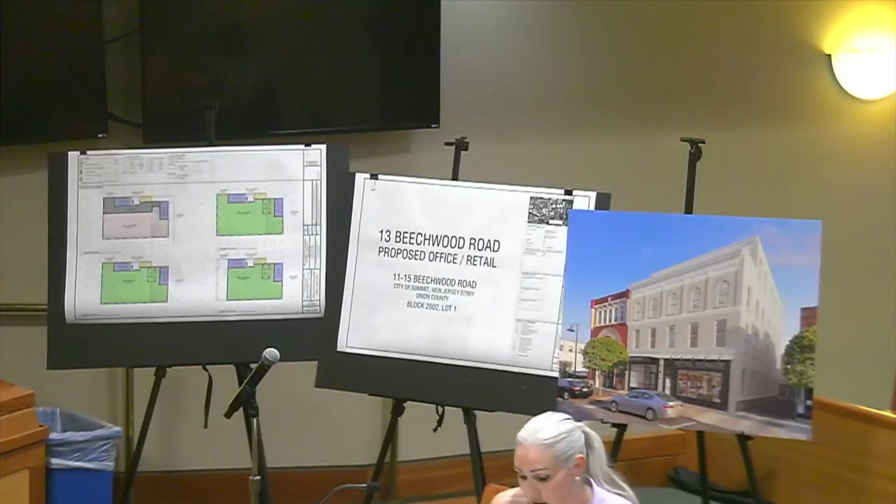Are you ready? Yes. In response to the comments and feedback received from the Board of Adjustment and the Historic Preservation Commission at the prior hearing, can you describe the process your firm undertook with the applicant to reevaluate the design and incorporate revisions to address the concerns that were identified? Yes, we listened to the board and the historic preservation comments regarding the facade, the Beechwood historical elements of the building, the detail, the horizontal features of it, and also just the nature of the architecture. We carefully went into the building, took our time to study the architecture, really study the floor, how the building was braced, how it was built, to see if we could actually preserve the facade.

After further consideration and analysis, we determined that there's a way to preserve the facade, set new floor elevations, do minor modifications to get ADA accessibility, modify the windows with slight tweaks on the sill heights, and really set the elevation so that we could work with that existing facade. That will require, if you don't mind, I'm going to approach the rendering and point out a few features.

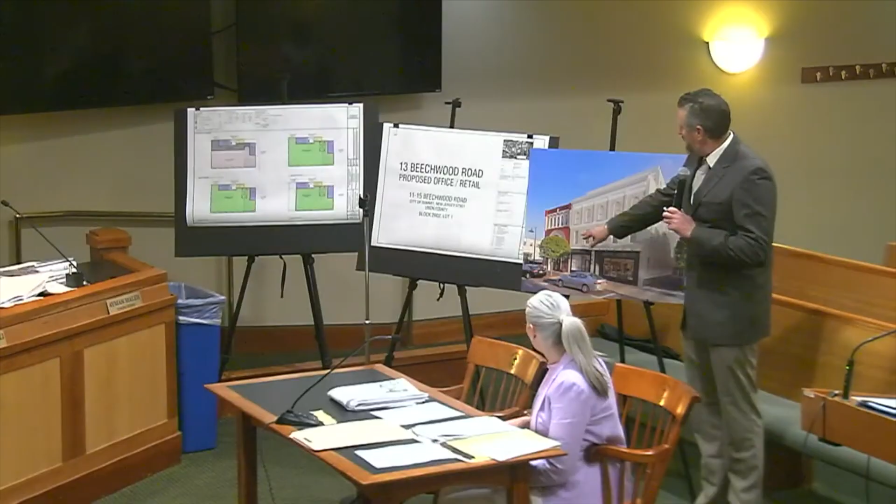We're going to repoint all the brick and repair it as much as we can. There are some cracked elements in that building we previously testified to. We're going to try and reconstruct that. If reconstruction doesn't happen, we'll have to strap it and make a repair to support it.

Reconstructing all of that element, the third floor windows will be restored to an arch top. They're currently square rectangular windows with a plywood infill on the top, so we want to make that an arch top window and bring it back to a full light.

The side facade, same thing—we're going to restore that arch top window on the third floor, and then going down we're going to infill and make that a full window opening. We'd like to remove as much of the window casing as possible. There is some blocking that will have to stay to put those new windows in, but we want to widen them out to as much of the masonry opening as possible.

The fourth floor is now going to replicate the building in the style of architecture. We were previously modifying that, but since we're restoring the facade, we thought it would be better to keep that similar architecture down the side alleyway, keeping that arch top, and making another cornice element at the top, then opening up because of the weight of that.

If you don't mind, I'm going to go to drawing A201. It's our Beechwood facade.

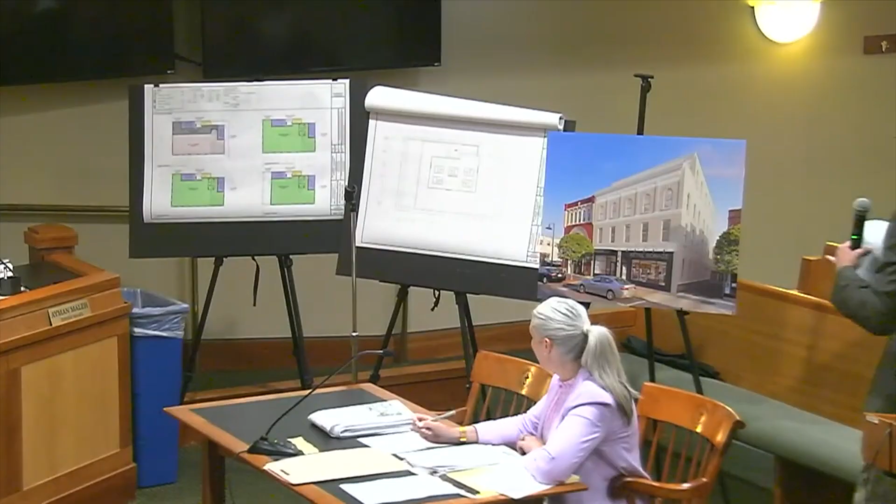Perfect. And then I think you had an exhibit, which should be marked A4, that goes through the FAR calculations for the building. So we prepared drawing AA101. I'll label it Exhibit A4. Are we up to A4? I thought the notes said yes. So A1 was the rendering, and A2 and 3 were materials and colors of bricks and things like that. Okay, I only had a note about 2, but I'll take your word for it. We'll mark this as A4.

So Exhibit A4, drawing AA101, is our proposed building area analysis, prepared to determine the FAR and how we calculated our floor area ratio. It's color coded: office in green, site circulation in purple for our stair towers, and support area for our mechanical shafts, which also count toward FAR, then common area and retail. Our basement storage doesn't count toward FAR since it's used only for retail storage. Our total FAR for the building is 12,331 square feet, which calculates to 299% of the FAR calculation. If you'd like, I can break down all those numbers.

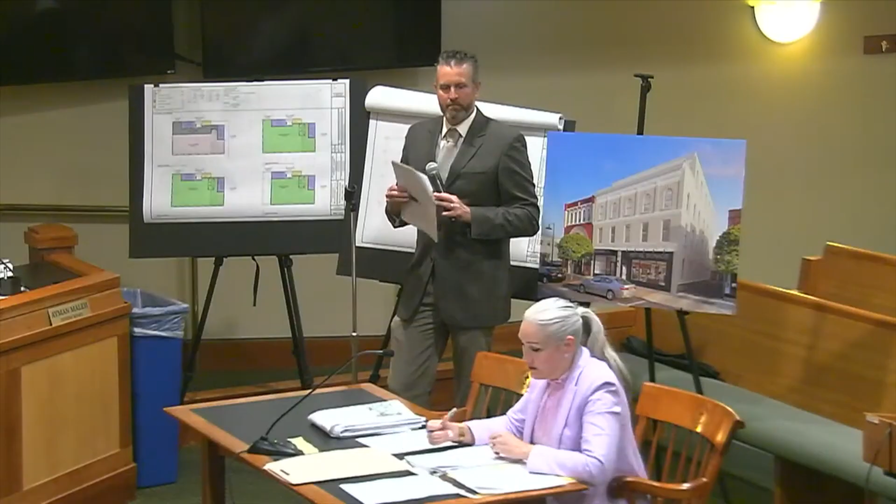And if you could just go through the rendering and discuss the materials and the colors. Do we need to bring this one in as a new exhibit? No, this is part of the filed plans. Okay, you're good, very good.

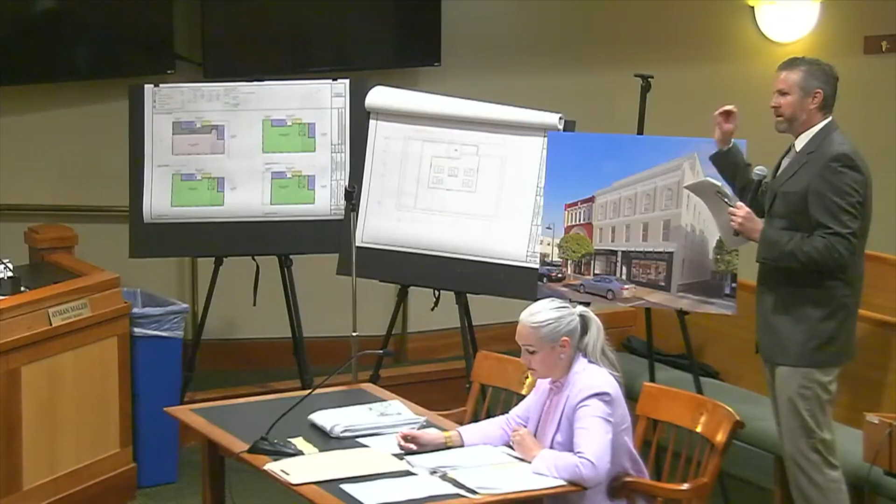So the existing building is white, pretty much washed out. Every cornice, every detail, every element of this building is the same color, as if someone just took a roller or sprayer over it. We want to accentuate some of the details with a light color pop on the cornice on the second floor, the cornice between the second and third floor, and the cornice element that caps the building. Also detailing and a slight color pop for the column capitals and the fourth floor element above, as well as the infill. The field of the building will be an off-cream or off-white color for a slight contrast, nothing too large, just something subtle that accentuates the horizontal articulation and makes the design feel more refined.

The side facade we're going to paint, because matching that 120-year-old brick would be almost impossible. We can find similar style and size but never get a color match. So we want to paint that side facade while keeping the rubble stone finish. Our base will be anchored with an off-charcoal color to make the retail entrance and office entrance pop from the street, giving nice contrast on the ground floor, while the field of the building neutralizes itself and gives balance.

What's the color of the storefront mullions, and what's the color of the window frames on the fourth floor? The window frames will be white on the second, third, and fourth floor. The ground floor will be bronze. Thank you.

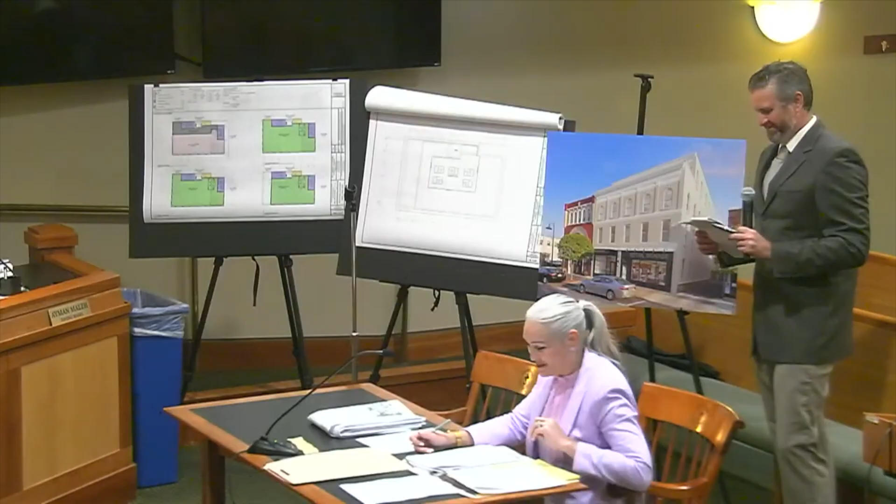You've prepared a comparative zoning chart, which I would ask be marked as A5. Can you explain what this exhibit demonstrates and how the revised plans compare to the original submission from a bulk and zoning perspective?

Yes, so we prepared a letter dated June 23rd, 2026, that was just a summary of our changes to the plan and the approach that we had. Attached to that is a zoning analysis comparative chart, so that is this document attached to that letter.

I'm not sure if the board actually got that letter. Oh, they did not get that. Okay, so I guess if you go through it, and then I can provide the board with a copy.

Okay, so the changes that we made were, the first one on my list was building coverage. We had a reduction in the building coverage from 84.10%, or 3,468 square feet, to 78 point- having a hard time seeing that number, I'm going to bring myself to my larger screen. Excuse me, you're comparing to the previous submission, not the current construction? Correct, just to clarify, the previous submission, correct.

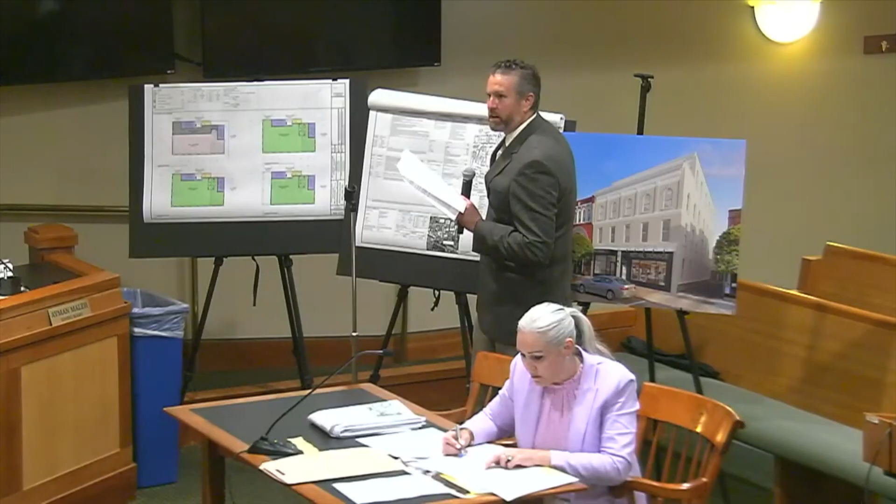So I'm going to utilize drawing T002, our zoning analysis and site data. Our building coverage was reduced from 84.10% down to 78.25%, so we had a reduction of approximately 6% in building area. That's a result of us having a greater setback along our adjoining properties on the east side and to the northeast side. So setting ourselves back reduced our building coverage calculation.

So how many square feet does that boil out to be? That ends up becoming 3,227 square feet, where it was previously 3,468, so it's about 240 square feet.

Okay, so you reduced that, but you actually gained retail space by doing away with the parking spots. Yes, but we also increased the setback in the back of the building, so that's where the reduction was.

Yes, and then I think there's also an increase in the total side yard from .01 to .06 feet. Yes, so we were originally going to build out at that corner of the property, the south side of Beechwood. We're set back just .06 feet, whereas previously .01 feet. So what's .06 of a foot? It's inches, yes. So you went from 1 inch to 6?

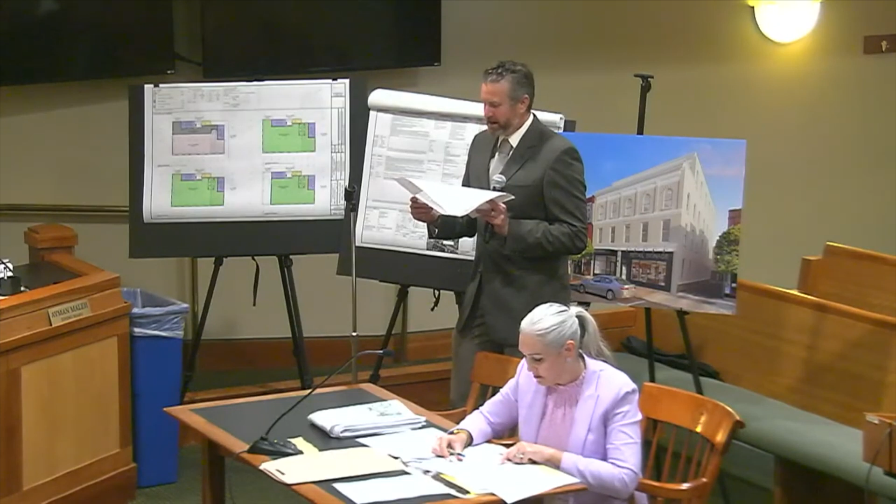As I testified earlier, it's a minor discrepancy, I wouldn't even mention it personally, but it is a slight change. We also reduced the building height by 3.67 feet, as I previously stated, and the appurtenance was 3 feet 1 inch. We've reduced the mounting height of the facade lighting by 6 inches, down to where the existing cornice line is. We've reduced the terrace lighting up on the fourth floor by approximately 2 feet, or 1 foot 10 inches, because the building height came down. Other modifications were signage mounting that was also reduced in height because that cornice holds us to a certain elevation, since we want to keep that existing cornice and not modify that existing facade.

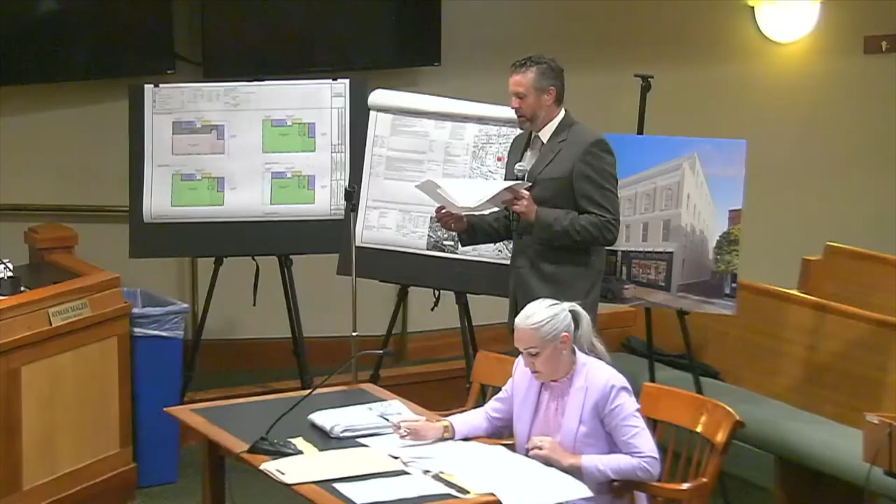And then we had a modification in the illumination for our lighting so that we had egress path lighting from around the backside. We need lighting to illuminate that 5-foot setback. So again, going back to SP401, just illuminating this 5-foot area along the back of the property.

Okay, and then the original application also included a fourth floor component. Can you explain how the role and design of the fourth floor has changed as part of the revised plans, and how it relates to the other modifications made in response to comments received at the prior hearing, using Exhibit A6?

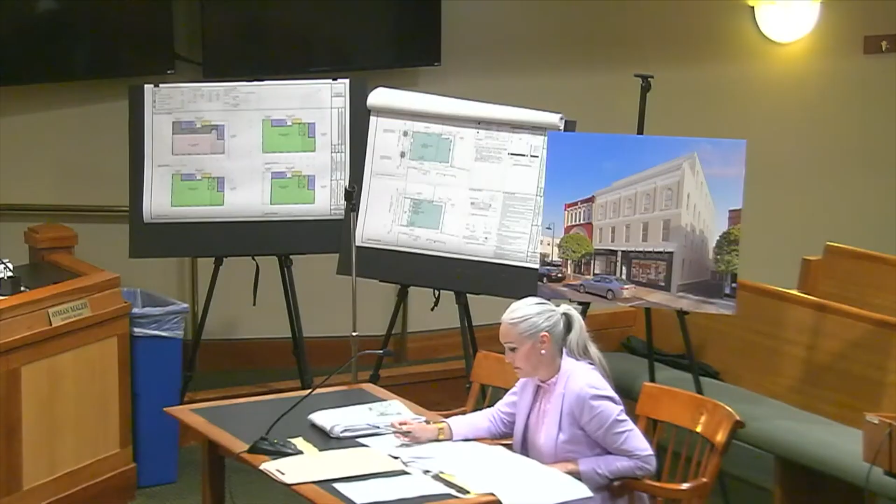So we prepared drawing A201, an area reduction analysis of the volume that was lost due to setbacks or other components or site limitations that we had. If I can, I'll label that A6.

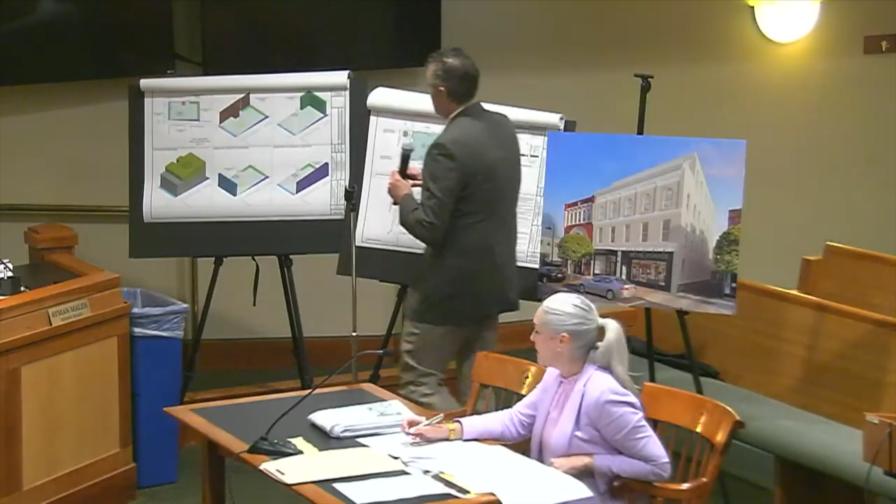And can you see that from over here? Do you want it in the middle? Would that be better? That's okay. You can easily- do you want to just move it to the middle? Because I think we can see it better. Thanks.

So we had a few constraints on the property. We have the existing facade, which is this image in the top right corner. The blue area is the existing setback of that facade, so that's 4.4 feet from the property line. That 4.4 feet across the property equates to 210 square feet, so that's 210 square feet per floor at 3 stories, which is permitted by the zone, by the CRBD zone, and that equates to 630 square feet of gross floor area.

If you had built to the property line- if we were to build to the property line, to that front property line, which is also permitted in the CRBD district.

We have a slight encroachment of our adjoining properties on the north side. Both of those buildings have a slight encroachment onto our property, and the elevator is allowed to be eliminated from the calculation. So across 3 floors, at 119 square feet per floor, that's 357 square feet gross floor area. Our increased setback of 5 feet, that L shape in green, is 327 square feet, totaling 981 square feet of total area.

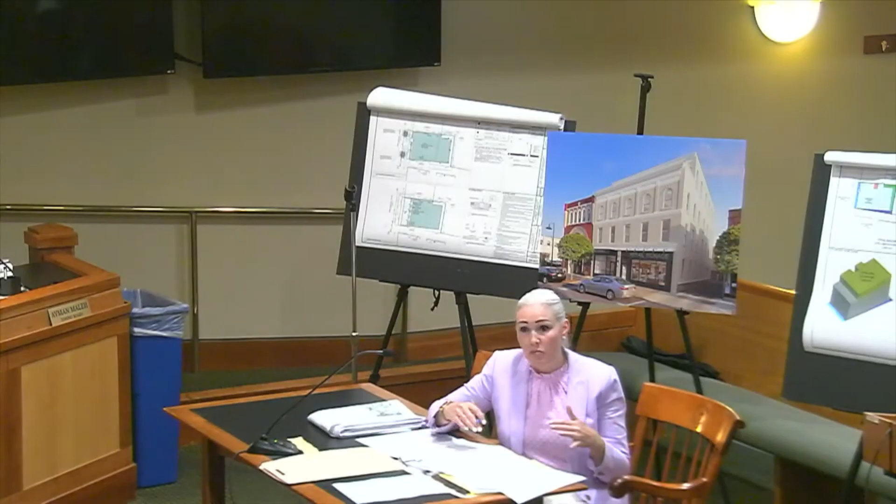A 300% FAR. So if they knock the building down and built it to the property lines, which they're permitted to do, they could put 300% FAR on 3 floors, but that would not be a better design. It would stick out beyond the proposing Boxwood property, so you'd have a building that projects beyond the Boxwood building, our adjacent property, which would then reduce the sidewalk. You'd have a building that was touching the neighbors. I'm just saying you're telling us you're losing that. Well, but you gained it with the fill into the backyard.

Yeah, from our previous application, we only gained 300 square feet from the fill-in of the parking. Times 4 is 1,200 square feet.

But I think it's easier to give a little bit of reference to what exists in this conversation, to not just compare it to the previous, because now we have a new set of drawings, and I think that's some of where these comments are. It should also be considered in relation to what is permitted, and what is permitted is 300% FAR on 3 floors. This is not a comparison from the previous scheme, this is a comparison versus as of right. Correct. That makes a little bit better sense.

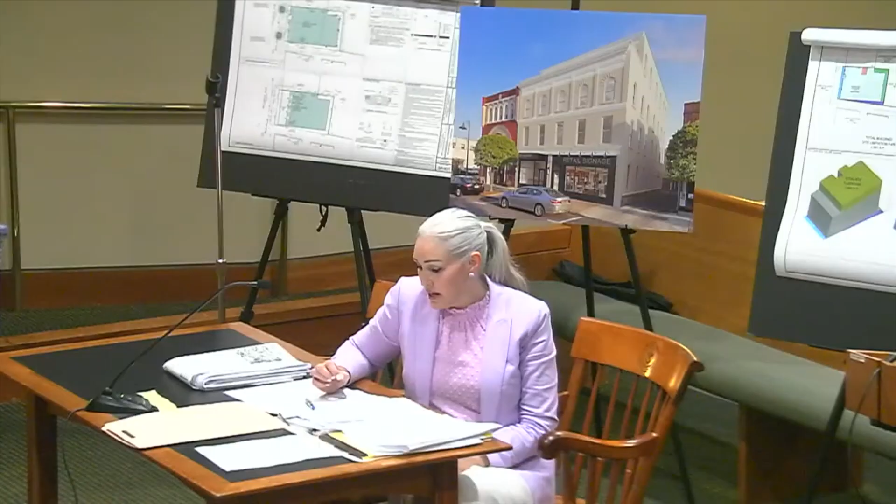Okay, and you also prepared a sightline exhibit A7. Can you explain what this demonstrates regarding the visibility of the fourth floor from the public right-of-way?

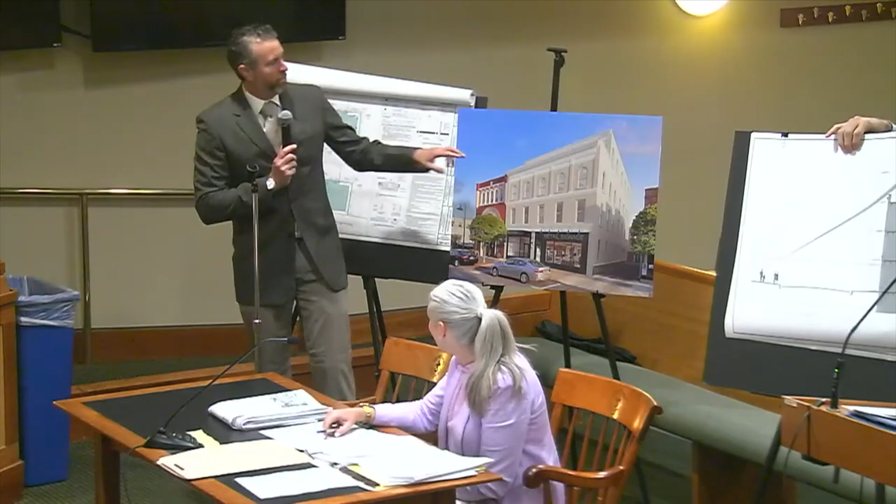I'm going to first start with the rendering because that actually depicts it. Do you mind putting this up really fast? It depicts exactly what you would see from the street. So we took this rendering from the opposite side of the property, and you'll get a glimpse of just that slight cornice on the top. We wanted to show the angle because we want to show the architectural style down the building, but if you're walking down Beechwood on the opposite side of the sidewalk, you would only see approximately 2 feet of that building across the top. And you would see it on the side, but because it's now the same architecture...

It blends in, that was the other reason why we wanted to stick with that similar architectural style, is that it would blend with the existing building better. So our line of sight diagram, and I'll come back to this exhibit now. Our line of sight diagram A301, I'll mark that as exhibit A7. It shows a person 68 feet away, about my height, with a line of sight that would give you the top 2 feet of the building.

So I have a question about that, because watching the video over the weekend and being out there this morning, and now seeing this picture again, that exhibit and the one at the previous hearing, was that not intended to show the view of a pedestrian? Because my reaction was that that rendering looks like I'm a very tall pedestrian, if I'm a pedestrian.

Yeah, it's me, a person of my height, so about 6 feet. The rendering was intended to show a pedestrian across the street, exhibited from the 6 foot eye level height. It's a different reference for different people, but it gives you a different angle and a higher projection line. So the shorter you are, the less building you'll see.

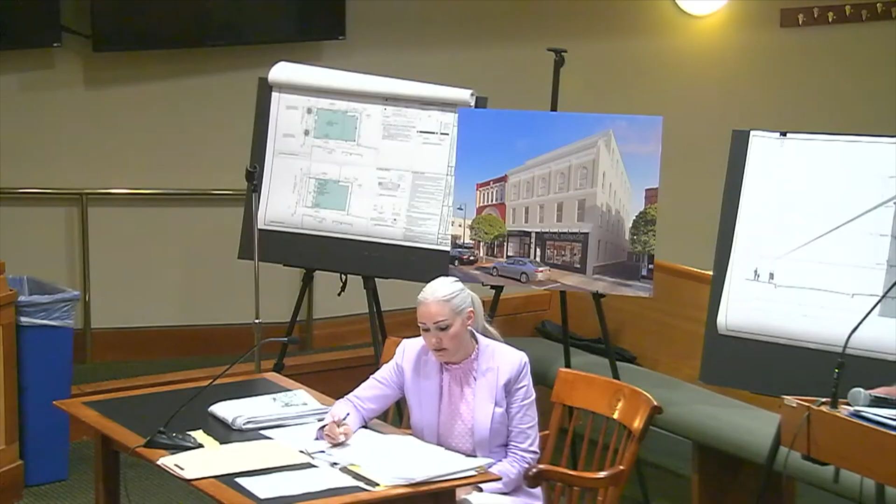Based upon all the revisions incorporated into the plans, including preservation of the existing facades, reduction in building bulk, the increased setback, and the revised design of the fourth floor addition, can you explain why the proposed design is appropriate for the property and consistent with the character of the historic district? Yes, my first statement would be that we met with Historic Preservation after we completed this redesign, and we felt they were supportive of us maintaining the facade and keeping it.

I know they had a few comments in their letter about mullions and divided light, and I'll address that, but by keeping that facade, it meets the intention of Historic Preservation, the CRBD district, and the Historic District. We maintain the architectural style, the features, the vertical articulation, the horizontal articulation. I think the paint scheme accentuates some of those features, so it's not just a bland facade as it exists today.

From the Historic Preservation side, they had asked about divided lights. Divided light, in our opinion, is more intended for residential application. This is intended for office use, so we want to give them as much of a clear picture window as possible. If we were doing this as an adaptive reuse for residential, we would clearly do a divided light window.

When we met with them, they had mentioned doing rectangular windows on the fourth floor with larger openings, but as we discussed, due to the hierarchy of architecture, putting a rectangular window over that arch top did not seem like the right architectural element for the building. Continuation of that arch top on the fourth floor was the right architectural answer to meet that Federalist and colonial style.

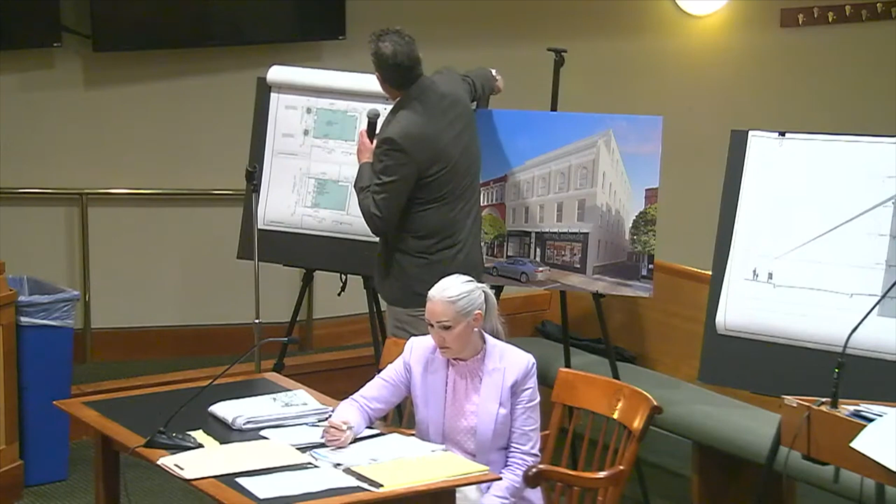How about pedestrian accessibility outside as this is being constructed? Yes, we have, and I can go to our site plan. Drawing SP 302 shows there will be a time where we will have to do a sidewalk bridge to protect pedestrians and maintain sidewalk access. There will also be points where that sidewalk will need to be closed for certain portions of the construction, but the intention is to try and maintain thoroughfare as we did with 475. There were times we had to close it, and times the majority of construction it was open.

So would you be willing to submit a pedestrian detour plan? Yes. Submitted beforehand? Yep, so we'll work with the police department and the building department to do pedestrian detour plans, site plans, and maintenance of traffic plans as necessary.

I think that's all I had. Chairman, thank you, a few questions. As was just mentioned regarding the sidewalk area, we had a question, it wasn't necessarily identified in our report, but I was thinking about the sidewalk. Do you see any utility improvements and replacement of the sidewalk necessary along the streetscape?

There will be replacement of the sidewalk. Okay, so you'll replace it in kind? Yes, in accordance with the standards that are out there? Yep, there are portions that will have to be cut up and removed as a result of general construction, setting the floor elevations, and the resloping of that sidewalk to meet our accessible entrance points. So I can actually show you the scope on SP 101, for the board.

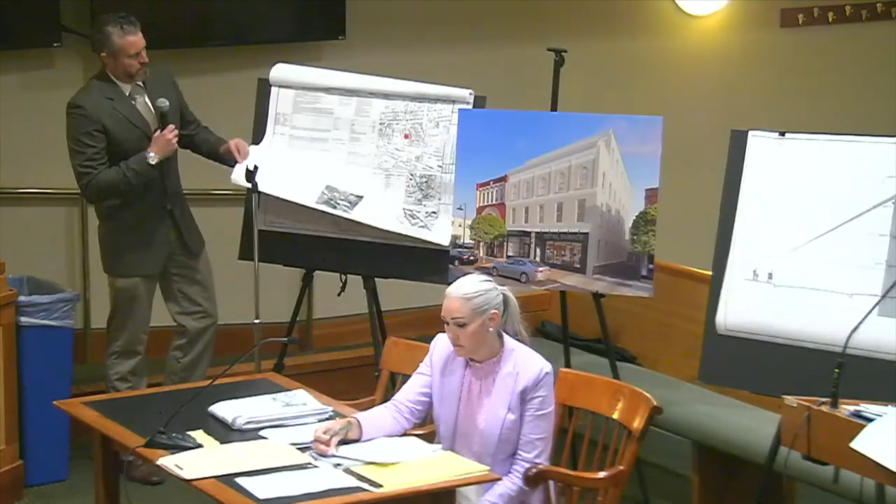So if you look at drawing SP 101, detail number 1, there's a hatched area that we expect that portion of the sidewalk to be replaced. It will end up having to tooth into that existing sidewalk, but we want to match the city standards there. And that's the hatched area you're talking about on the property? Yep, or it goes beyond the property because we'll have to rework some of that slope and sidewalk to maintain accessibility. I see that now, okay, thank you for that clarification.

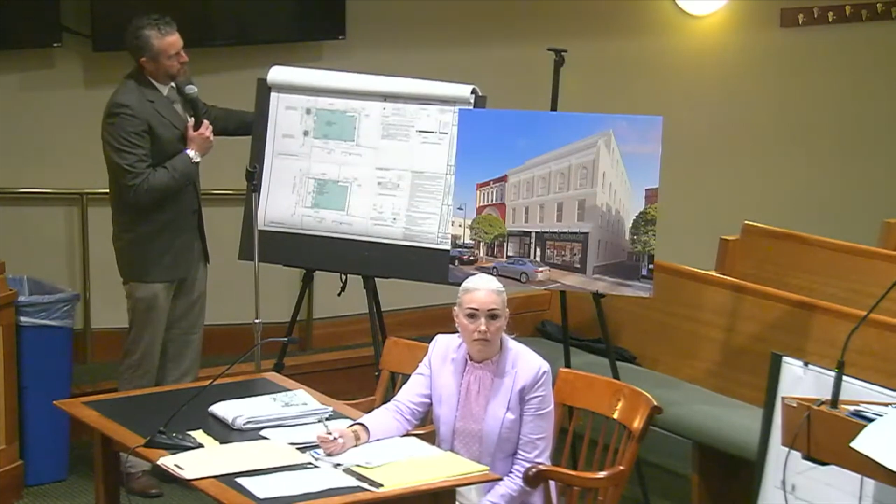Regarding the dumpster enclosure areas, I think you just identified that you did an analysis to make sure there's enough trash area for the rest of the building? Correct, so that's on drawing SP 401. There's a trash calculation or refuse calculation in the top right corner, which has been revised since our previous application due to the area of the building. Okay, thank you.

Looking at the architectural rendering that you provided from the street view, the side elevation of the building, the alleyway itself, is there any need to differentiate the fourth floor from the third floor? Is there any benefit in doing so from the design standards guidelines? It talks about breaking of horizontal or vertical elements. I know I don't want to cross over with the historic commission, but is that something you would have an opinion about? Yes, we wanted to maintain the third floor.

Again, changing the spacing of the windows and the style of the windows would have changed the hierarchy of architecture. So that arch-top window on top of an arch-top is what you would see in the colonial or federalist style. Okay, and any reason to have a cornice or band that would break? It doesn't exist today, so we wanted to maintain the existing. Right now, the current facade actually steps past the chimney and drops low. I can indicate that line on drawing A201, I'm sorry, 202.

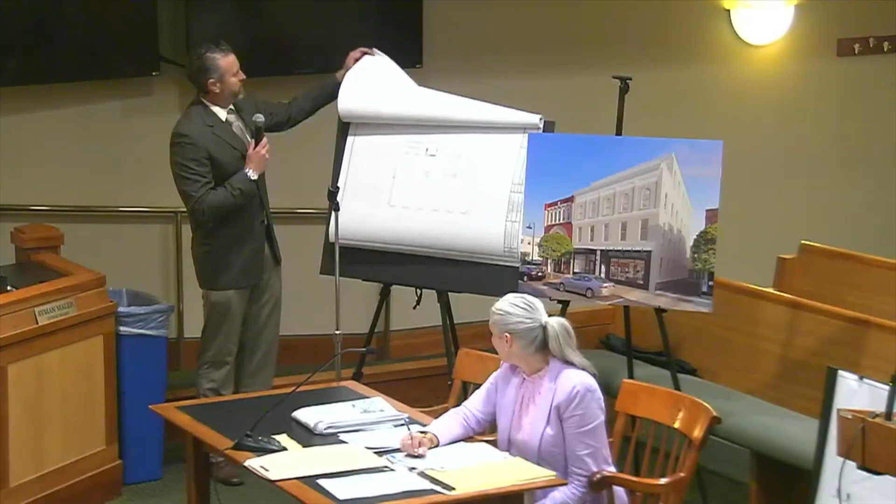So drawing A102, we have a front entrance here for the retail space. Due to the depth of the retail space, subject to occupancy, they may need a second means of egress, which would then have to egress through the back of the building here. And then all office corridors or office features in 4 stories or 3 stories or more require 2 means of egress. So we have an egress discharge off the back.

And during the nighttime hours, we want to make sure that that pathway along the back property line or rear property line is illuminated. But that illumination's occurring at ground level? Correct. And it's really just illuminating the back alleyway? That's correct.

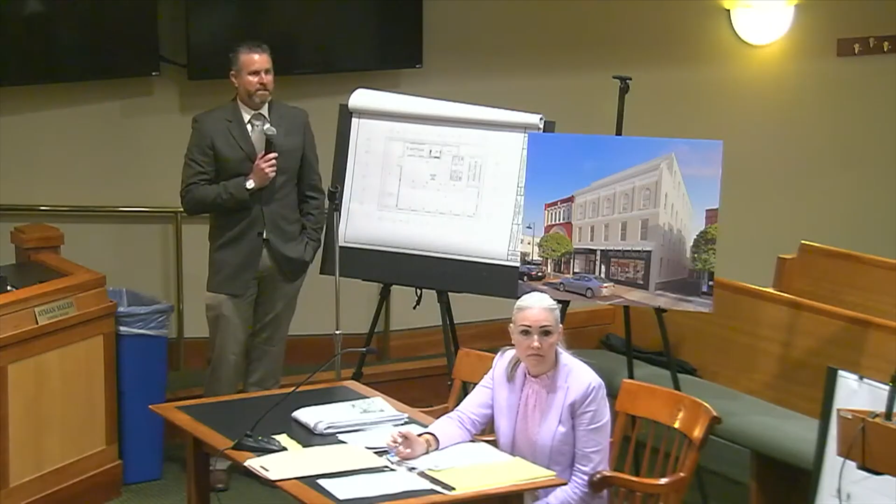You may have covered this in the prior testimony or prior hearing: what is intended for that upper outdoor space? Are there any events planned or any planned utilization of that, or is that really just an amenity space for the office? It's intended as an amenity space for the office user. The hope would be it's a single office user that can utilize that space as one, subject to how this building gets leased. But it's intended as the office use.

Any outdoor speakers anticipated for that space? No. Okay, thank you. There was an application where it was an upper terrace with outdoor speakers - that's why I touched on it, so thank you.

No further questions. I believe in our previous testimony we did put hours, kind of a time restriction, on that utilization, so you're stipulating to that? Correct. Yes. Okay, thank you. Thanks, Ed.

Board members, what questions do you have for this witness? Mr. Kern? Thanks, appreciate the reduction in the height variance or the request for the height variance from the last presentation. But, I'm not sure if I heard it yet or not, but what are the special reasons that exist for us to grant the variance? Because it's a D variance, and then maybe touch on the positive criteria, that'll further the purpose for the municipal land use law.

So we do have the planner testifying next. I don't know, he can answer that question for you. That'd be great. Thank you.

Great, Tom? Yeah, so there was a lot of testimony at the last session by Nick - I won't even try to pronounce his last name. Sapteris. Thank you. Yes. He didn't use the word impossible, but it came close, saying it would be impossible to preserve the facade, okay?

So you use words which make me think, is it more accurate to say you're preserving or replacing but having it look similar, or is it a mix? The intent is to preserve it, but we will have to replace certain elements of it if they are found to be damaged. The reason why that testimony was put on the record is because it will be very difficult to do. And through lots of conferring with our client, he has agreed to undergo that challenge with us.

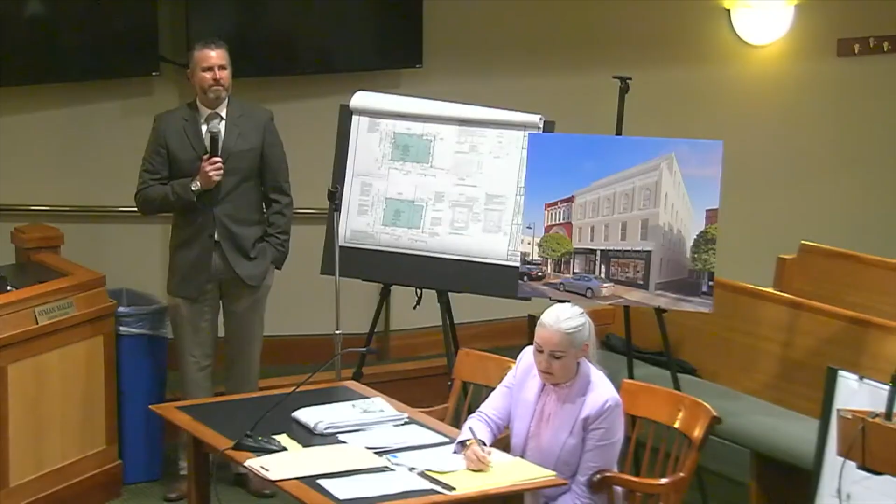Okay, can that note be updated to say that you will manage it? Absolutely, it just, because I think that maybe we can provide clarification for Marie on our note. Yeah, thank you for bringing that up, because all of a sudden when you started saying it, that was something I thought about. It sounded like when we read that, you were just going to discontinue it, to heck with the neighbor, and—No, to the contrary.

So you're going to disconnect it and redirect it, correct. I think Mark would be upset if we disconnected it and left his neighbors abandoned. It could also be a problem for your building itself to have everything come towards it. Correct.

So that was one. The last question I have is going back to Ed's comment about putting some kind of cornice between the third and fourth floor, some kind of separation. I see what you're saying about the building, sort of the jog. Yeah, if you can go back to that. Yep, I'll get you the side elevation, A202.

I guess my question is, is there a place to add something sort of decorative in there? If I'm looking at it straight across, maybe something that looks like a sill under the fourth floor windows, something that gives it a little distinction to break up the floor, to the point that Ed made. Shouldn't there be a hierarchy between the main Beechwood facade and the alley facade?

Yes, that's what I was going to say, is that I think if we wrap this cornice around, it will take away from the Beechwood facade, and it would actually accentuate that fourth floor, where right now it blends in vertically as part of the field of that side alley. So if we had that horizontal break here, I believe this would look like a cap on the building rather than part of the building. Okay, thank you.

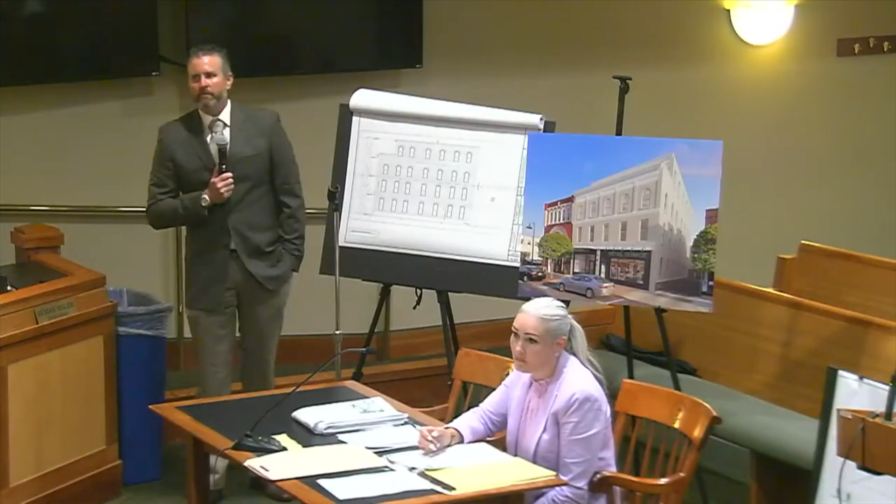I'm sorry, I didn't understand. Are you talking about the rear neighbors? Yes, they're both on the, I guess it would be on the alley side as well as the north side. So I'll go to SP 101. So there are windows on our adjoining property here, and then there's a window here, and we're proposing a few rear windows as well. That window to solid ratio can't exceed 20% with the 5-foot setback, so we are under that calculation.

All right. Any other questions, Don, go ahead. Are there any exterior sprinklers on that wall? No, it's a fully sprinklered building though, within. And we've done deluge systems on facades if necessary, but we would defer to the fire subcode to advise us on that if he requires it. But again, it meets the building code standards for setbacks.

All right, any questions only? Oh, go ahead. You said there's 5 units, where are the 5 units? Is it like retail 1, and then each? Yes, so just got that. I'll walk through each of the floors really fast.

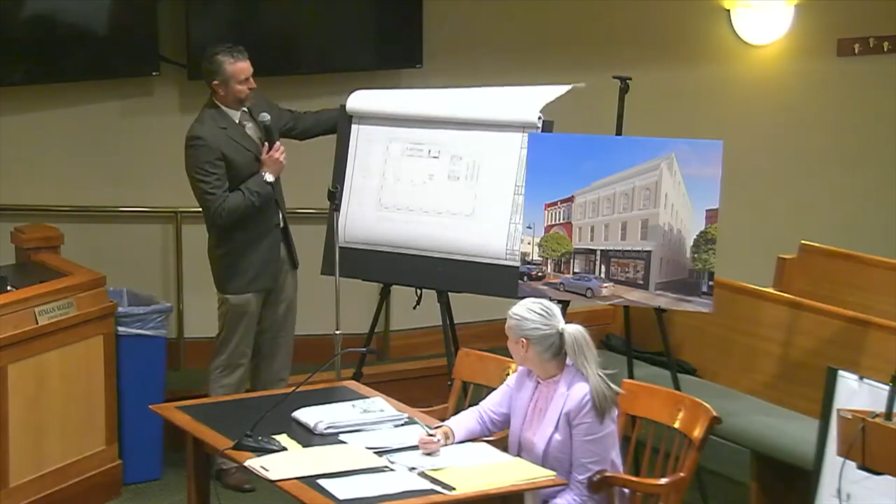So I'll start with drawing A102, which is our ground floor. We have the retail as number 1. We have the office lobby, or first floor common area, as 2. We want to keep those zones separate. And then there are 3 floors, so we have 1 unit for the second floor, 1 unit for the third floor, and 1 unit for the fourth floor, which would be the 5.

The second one on the first, on the ground level is what confused me. Yes, I don't, because of hours of operation, we don't want to have retail and office commingle on their units. Great.

Do we have questions, questions only from the public? No? Okay, next witness, Hillary. Paul Greigel.

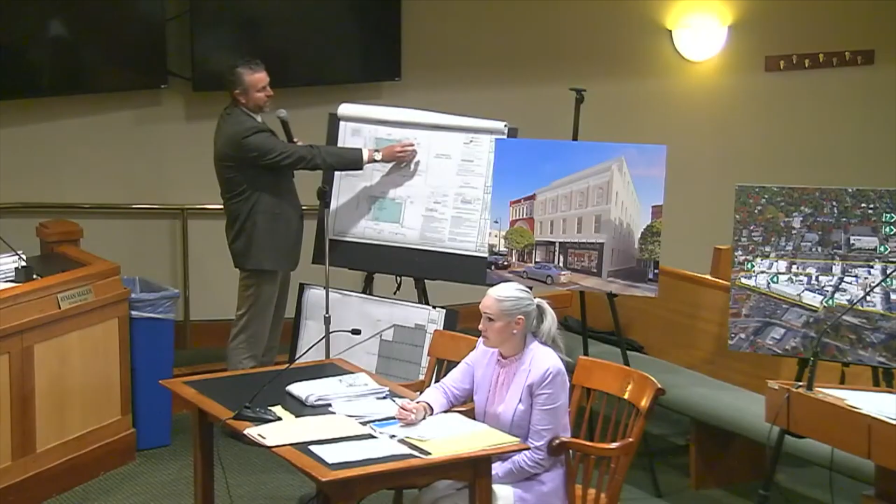I'll bring up SP 101 because that's probably going to give the best orientation of the building. So you're correct, the Beechwood facade faces west. The sun pattern runs along the south here, so your shadow would be cast starting in the morning, going across Beechwood Road, but because of the setback, it will cast a shadow on the terrace, essentially upon itself. As it comes across the site, there'll be a slight shadow onto the roof of the northern property, and continuing about midday—this is only during winter—a low sun then casts a greater shadow onto that roof. As the sun sets, it'll cast a shadow into our previous parking area and onto the building to the east, which already currently has a shadow on it.

So I don't think there will be a negative impact on the shadows from the property. How many stories is the building behind you? It's two-story. Thank you. And the one to the north is a three-story building. So you don't envision any impact from shadows? No, it will not exceed the building limits of what's existing—there's already a three-story building casting a shadow there, so okay.

And then the last question I had—maybe Mr. Ball has this—there was some discussion about noise and when the lights would be used, and no speakers. I don't know if that should be a condition. I'm sorry, I didn't write it in my notes from the last meeting—what were the stipulations about the hours of use for the outside?

That terrace—I think there are apartments in some of the buildings surrounding those office buildings. Some of the top stories are apartments, so from a residential impact standpoint, I don't see it impacting businesses at night.

We had said the hours of operation for the rooftop would be 7 a.m. to 10 p.m., which is standard for other rooftop amenities in the CRBD. The lights would be off at 10 PM, and no speakers. So lights off and no speakers—can we make those conditions? Yes, I would imagine the applicants would accept those as conditions.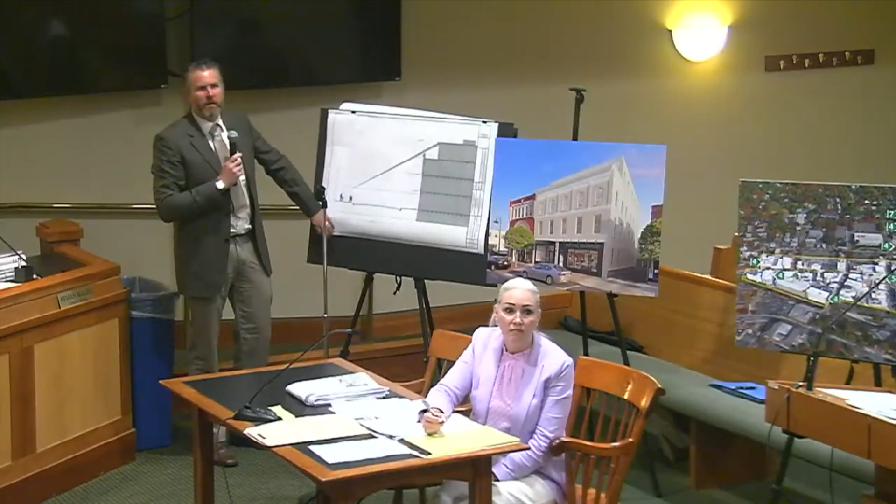What's the finished ceiling height? The goal is 9 feet minimum. So between the HVAC and the sprinkler system, we have 12.5 feet floor to floor, which would give us the 9-foot clear ceiling height.

So I was thinking along those lines - can you bring that ceiling down? But a 9-foot ceiling, candidly, is probably about as tight as you'd ever want to go. So I was thinking, can you bring that floor down to get your height down? But it seems like you guys are already on that line.

So to speak to your question about why the 12 feet and why the dimension we held - these two egress stairs need to be remote, which means they have to be 1/3 the diagonal distance of the building, and they're actually spaced as far apart as they possibly can. So pushing that back further would have put the stair on the terrace, and you'd have to egress through the terrace to exit.

They have to be so far apart? Yes, they have to be at least 1/3 the diagonal distance of the building - that's the minimum, they can't be any closer, but they can be further apart. I thought you could not be more than 75 feet from any exit. Not in a sprinklered building - it's 100 feet on office use. But that means you need two means of egress, and those cannot be less than 1/3 the diagonal distance of the building.

But if you shifted the doors down on that drawing, I guess it's to the south...